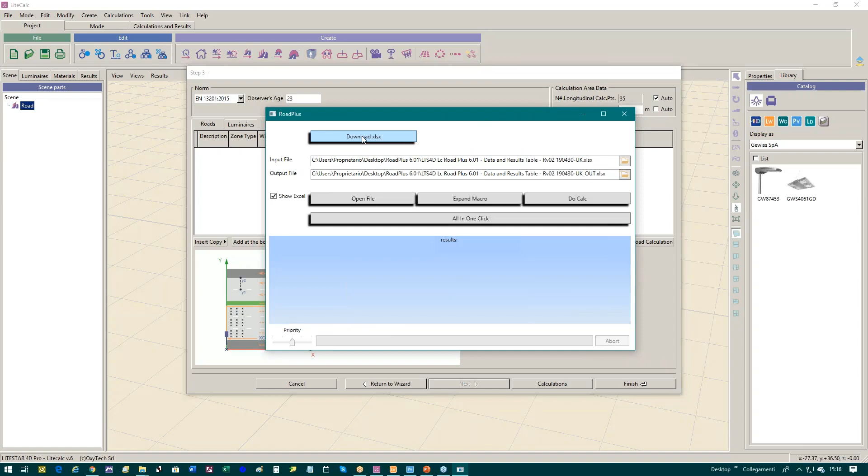From here, you can see that it is possible to switch straight away to our website, where you can download the file. The Excel file we use to input the information, and also the program we use to input all the results, is already available through a folder I have here. Which is this one. Let's open the file and let's analyze the different parts of the file.

As you can see here, we have 3 sections. We have 3 pages. The first one is the main, where we input the information. The second one is the configuration, the CFG section, where over here you can have the description of the distribution of the luminaires. We can have yes or no if you have one way or 2 ways. The IPEA areas, which is the calculation about the Italian standard for energy efficiency of road lighting.

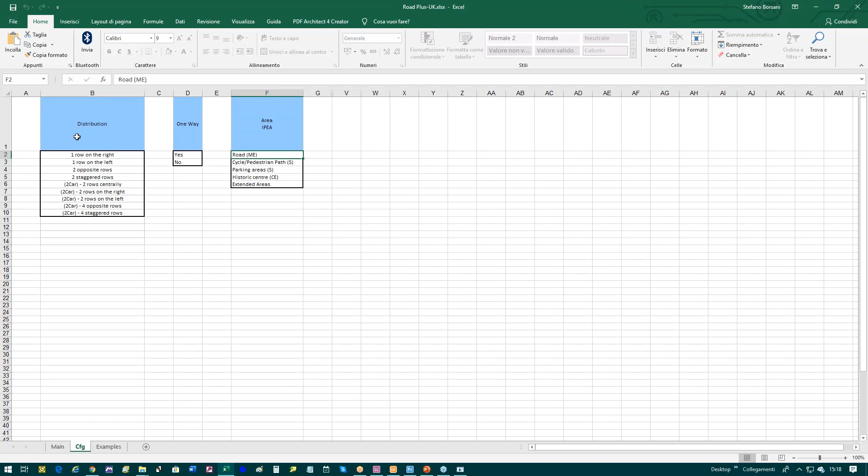But over here in hidden mode, we also have the section regarding the way to configure the ranges and some other features. If you have any need to change these parameters, it can be done, but you have to ask OxyTech the command to open the section. At the end, we have the third page, which is regarding the examples.

As you can see here, it is possible to input some empty rows without any information, which was not possible before with the previous version. The program used to stop in case of finding an empty row. Now it is possible to input an empty road, also already configured, but even a file which is not configured. Over here we have some examples about how to manage the ranges and how to manage the values. So let's analyze this one.

In here we say that the installation height is 8 pipe 9.5. It means that we want to run a calculation with a height of 8 and another calculation with a 9.5 meter height. In this case, we have the range. So we have the square parentheses, 15 colon 20, close the square parentheses, 2.5. It means that we ask the program to run the calculation for the spacing interdistance of 15, then 17.5, and then 20.

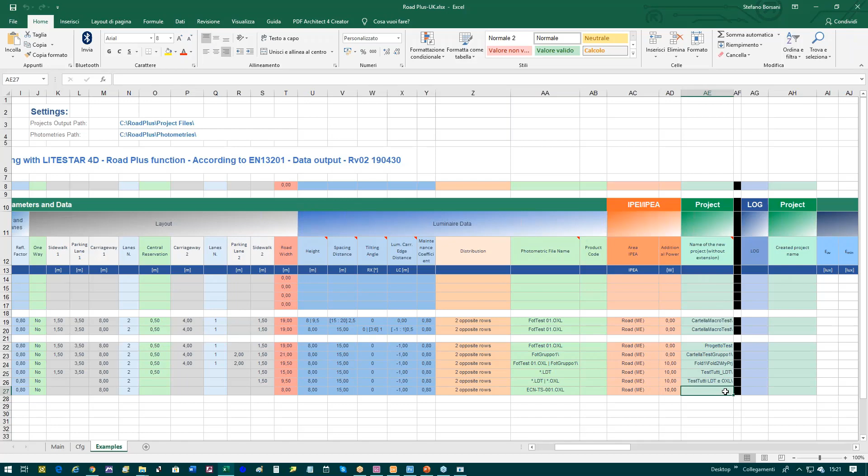In here, we have the project name definition. If we do not define any name, then the program will automatically consider the name, merging together the description at column A, column C, and column D, all together, separated with a dash. In this case, it is the same, but all the projects will be included in a subfolder of the main folder called in this way. And the name will be generated in the same way as the previous case. In this case, it is the same.

In this case, we are showing that it is possible to define subfolders, and then at the end, the name of the project. When you define the name of the project, and you have different cases because you define the ranges, then the program will automatically create a name in this way, but the second one would be the same name underscore 02, underscore 03, etc.

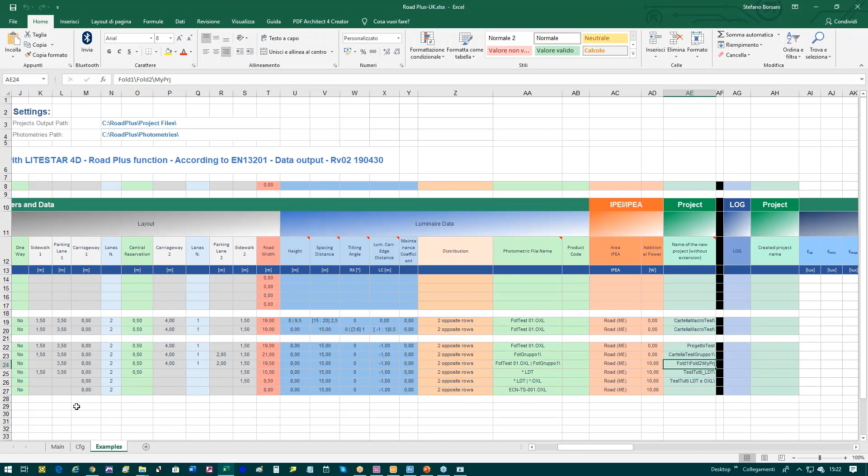So let's consider the example, but before that, let's go back and check if the folders were defined in the proper way. So we open, and we have the photometries, and we have to define the main folder. So we copy the path name, we come here, and we paste. You always have to add the backslash here. The same for the project.

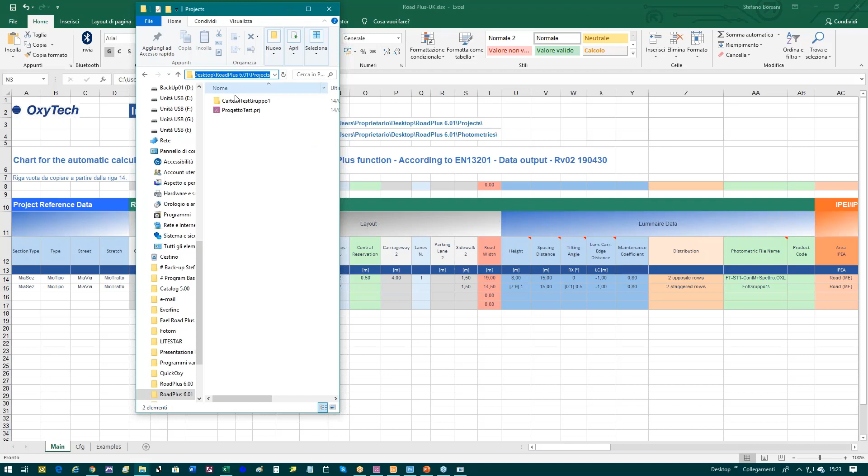So we take the folder, we go back, projects, and we copy the projects. We also remove these ones. Okay. And again. Okay, so the main folders for the projects and for the photometries were defined. Now, let's come to the definition of what we want to calculate.

So, we select for the carriageway an M3 class, C1, no, we want to have a C2, and for the sidewalk and parking lanes, we define a class of P3, one way, and the width of the sidewalk, the width of the parking lane, the width of the complete carriageway, the number of lanes, the central reservation, the other carriageway, there is no parking lane, and the sidewalk, for a total of 19 meters. Then we define here that the height should be 8 pipe.

It's not necessary to input the space because the space is not considered by the program. So in this case, we are saying that we want to run the calculation at heights of 8 and 9. The spacing distance we place at 25. The tilting remains at 0. And we put the luminaires at a distance of 1 meter behind the edge. And in this case, for the other, let's say that we put 1 meter above. The maintenance coefficient, 2 opposite rows. Okay.

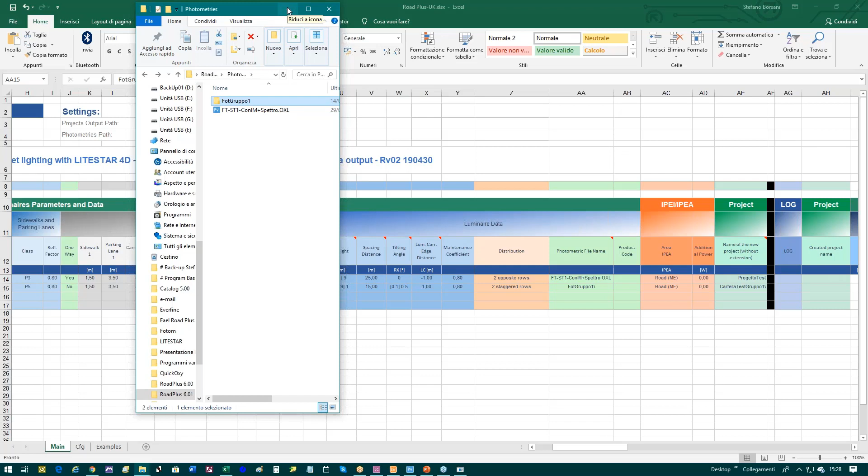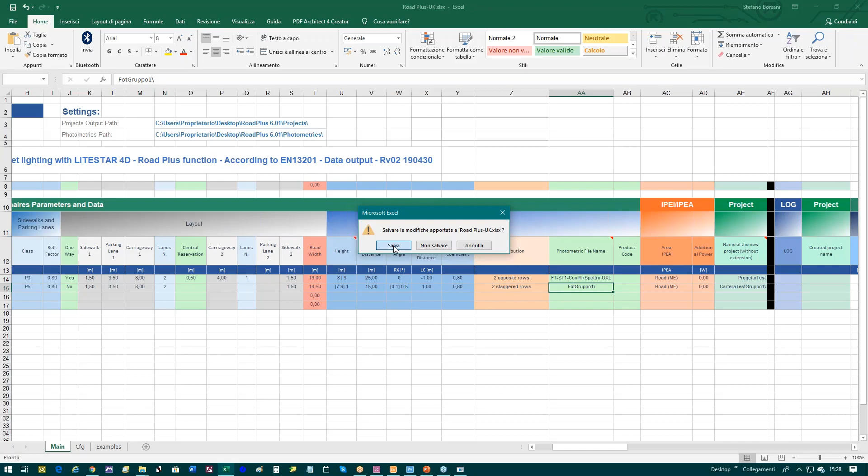Okay, and that's it. So we can consider that the data input is over, and we can start with the calculation. So we have to close the Excel file. We save. And we select Open File. Sorry, before we have to define which is the main file. So it is Road Plus UK. And now we open the file.

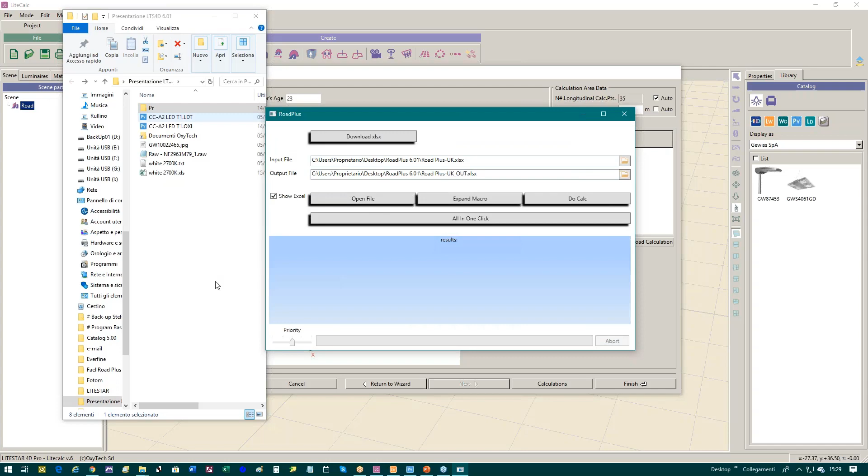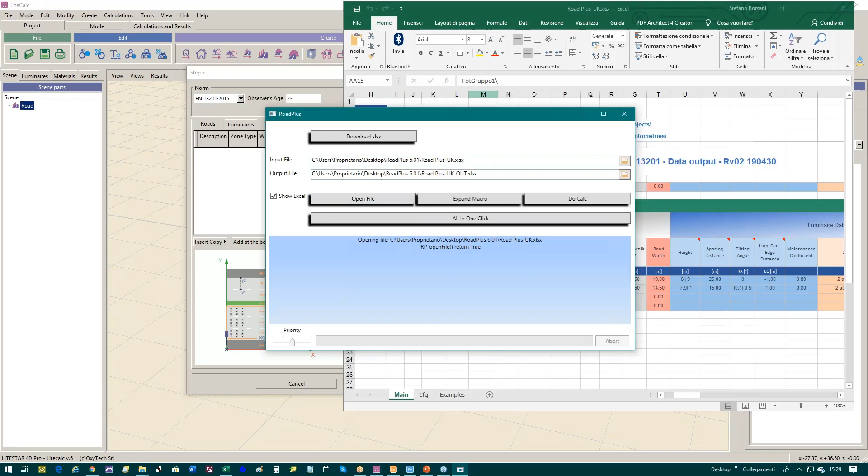As you can see, automatically the program created another file, which is the output file. So the program is not using exactly this one, but it is using a second file. So the first one will be virgin. Okay, so let's open the file. We put it here, and let's expand the macro. As you can see, automatically the program is expanding the different configurations, and it's over. We can then start the calculation.

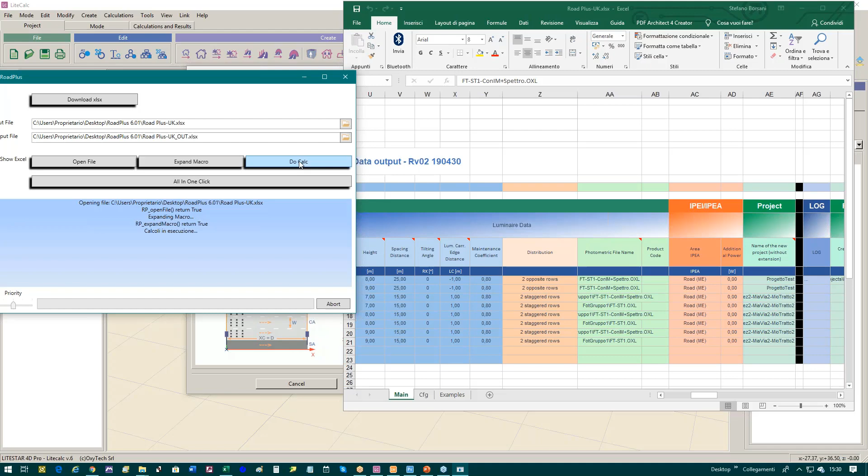As you can see, one by one, the program will run the calculation and fill the different cells with the related values. The calculation speed depends on the configuration of the road. So if you have to calculate on many different sections, it will take a little bit more than the simple road with a single carriageway. Let's say that we may have an average of, depending also on the computer, 5 up to 10, 20, maybe more projects per minute.

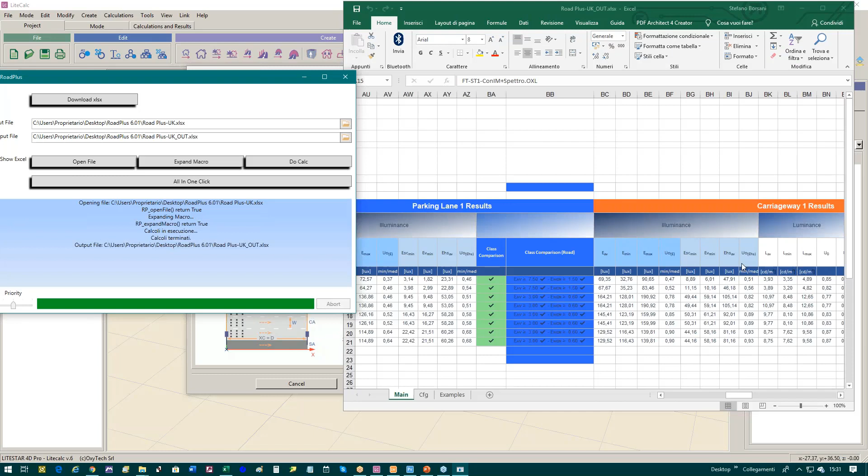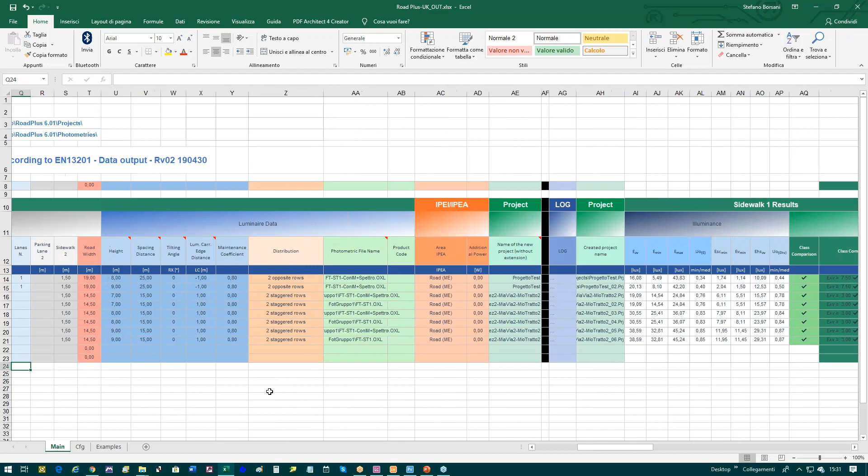So now it's over, the calculations were finished. We can close the window, the Road Plus window. We can take the Excel file and analyze the Excel file. As you can see, all the configurations that we gave are fulfilling the standard. And if you want to run a selection in function of different parameters, you simply have to highlight line 13, and then you select filters and you apply the filters.

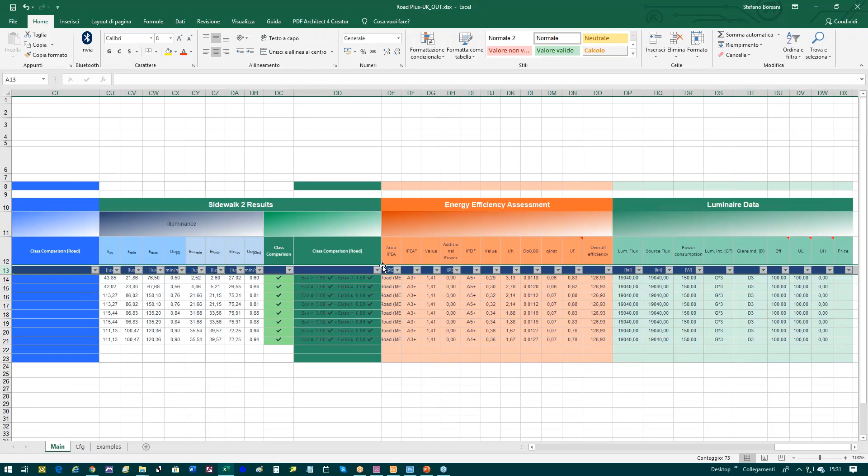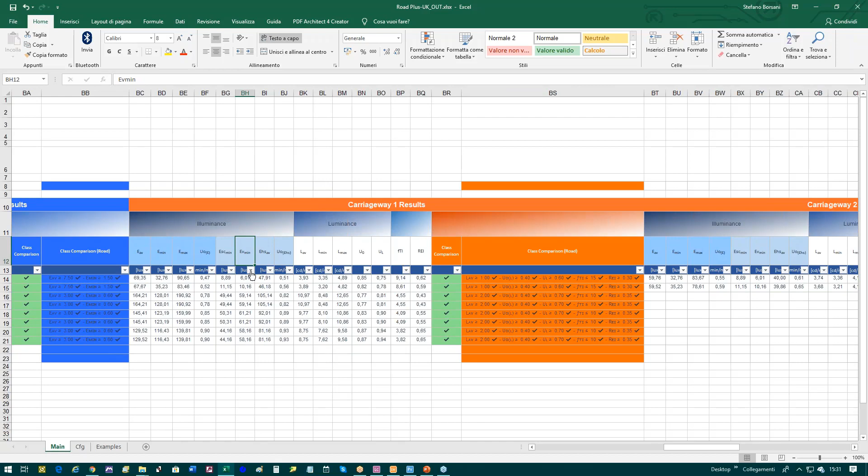So, for example, if you want to have a selection based on, I don't know, maybe on the EV minimum values, we simply select the minimum value or values, and automatically the program will filter. So we can come straight away to the configuration of interest, because now we go back to the project name.

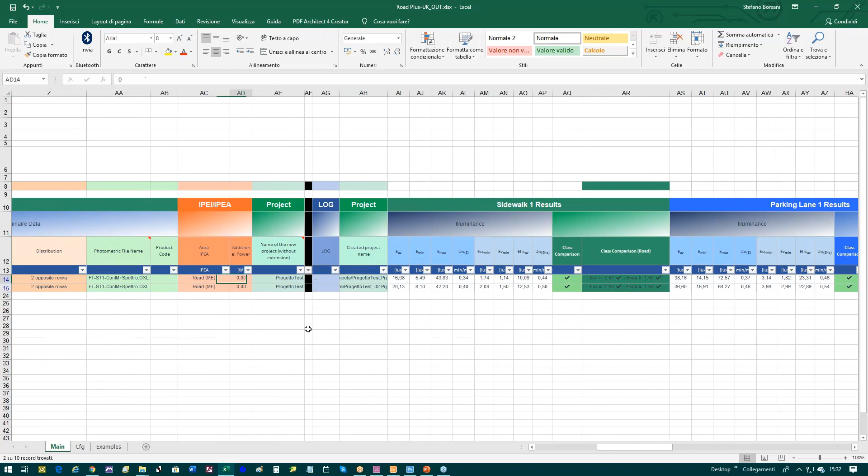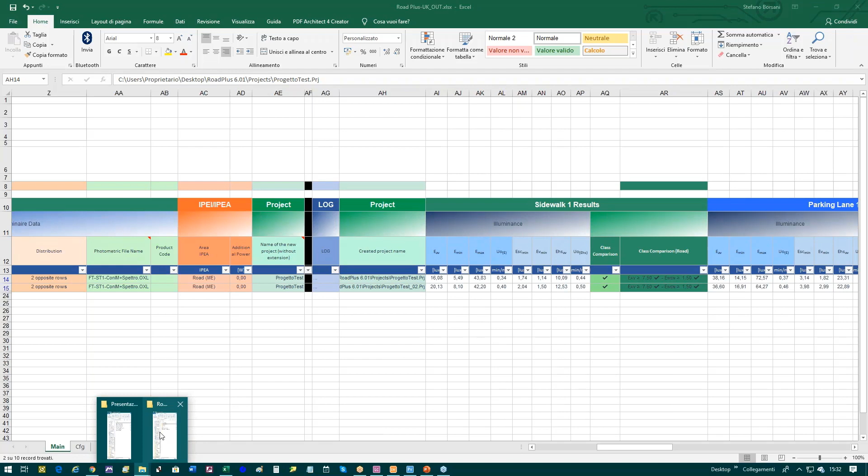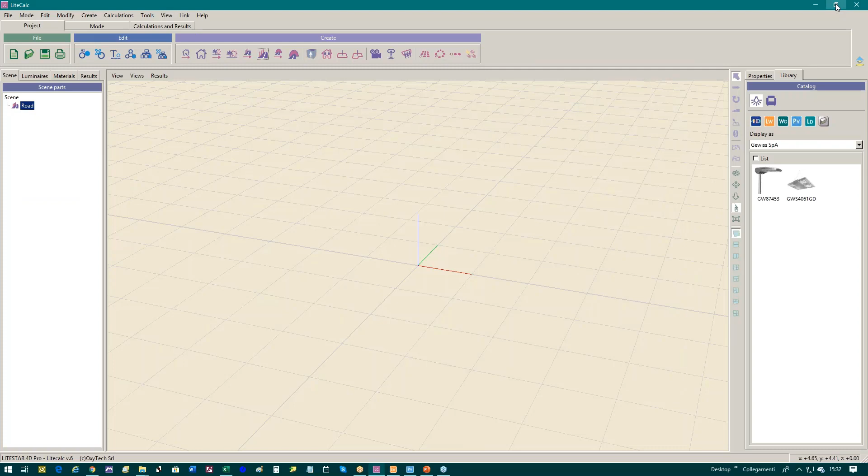So it is the name Progetto Test. So we open the folder, projects. All the projects were done and saved here. Also in this way for the ones related to the subfolder. We take this one. We come out from the Road Plus calculation. We reduce and we open the file. Once you open the file, you can analyze it.

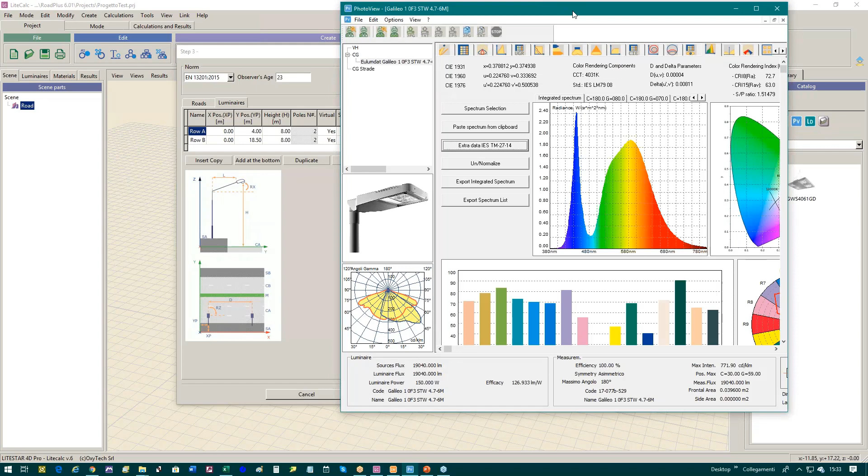So, for example, if we go and modify the road, we can come to the luminaires. As you can see, through the OXL file, we can have the image of the product, we can have the photometry, but it is also possible to analyze other data through the PhotoView. For example, the spectrum. As you can see, in this case, we have different spectrums because this luminaire was measured through a goniospectrometer. So we have all the spectrums related to the luminaire taken at the different C-planes and gamma angles. At the beginning, you also have the integrated spectrum.

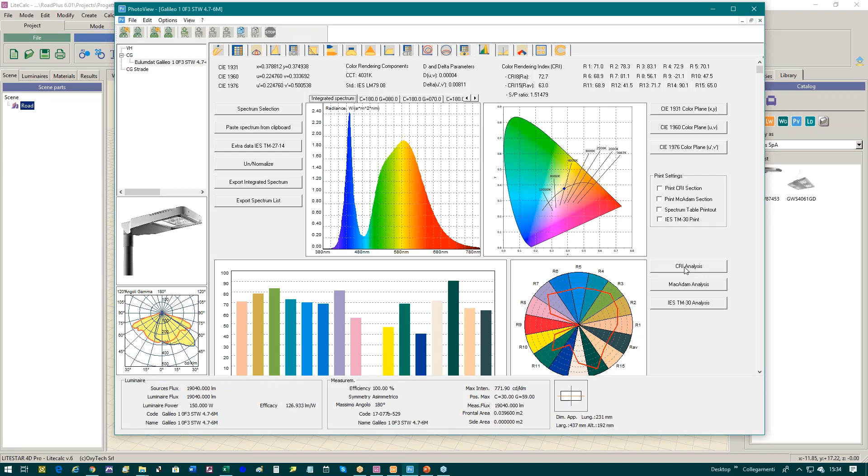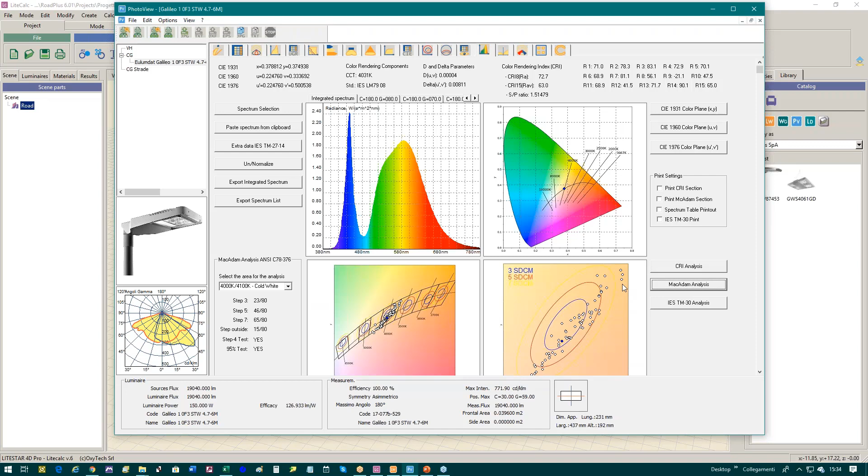Through here, it is possible to analyze the photometry, the spectrum, from different points of view. So, for example, from the CRI point of view to the MacAdam ellipses, where you can have here the dispersion of the different spectrum coordinates, and the IES TM-30 analysis.

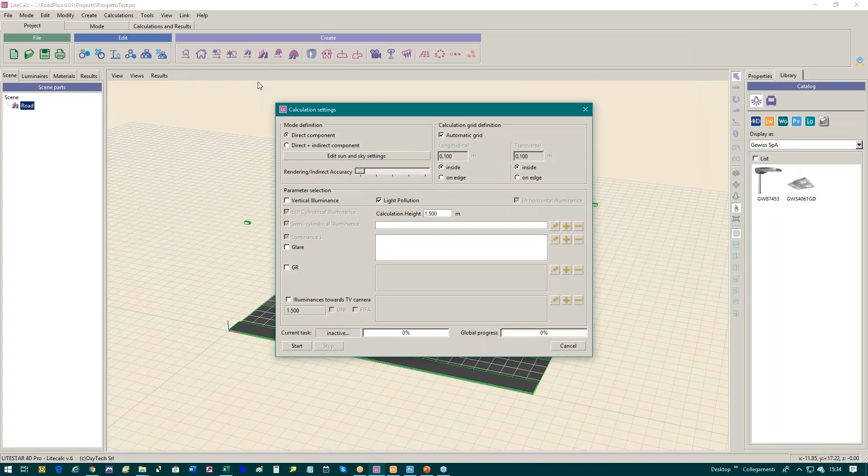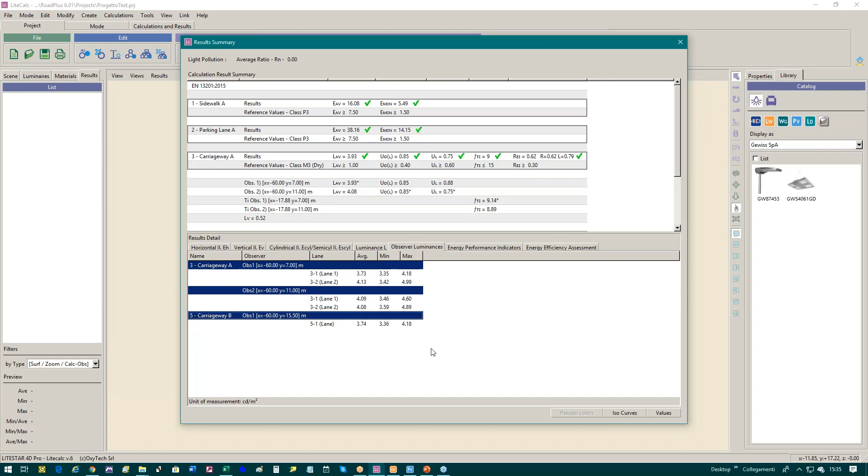If we go back to the project, we run again the calculation. So here we have the check of all the different parameters related to the standard we are using. And from here, we can, for example, select this one. We select this one and select this one. We want to see the values. And in this case, we want to switch to isolux curves. From here, it is possible to print the project.